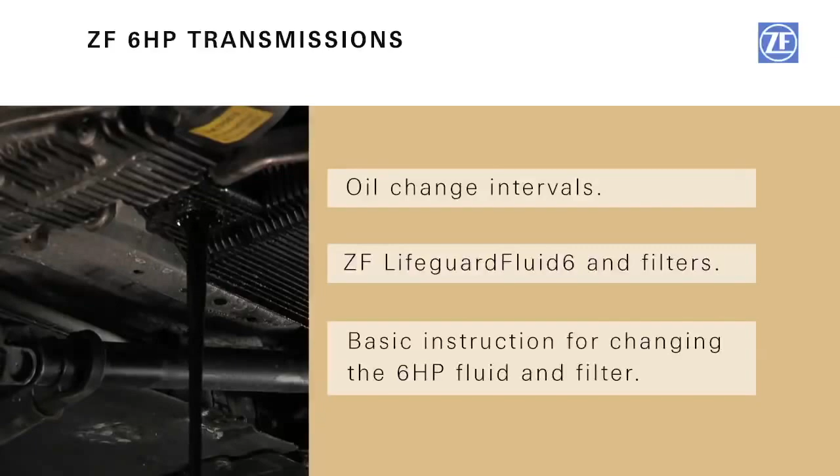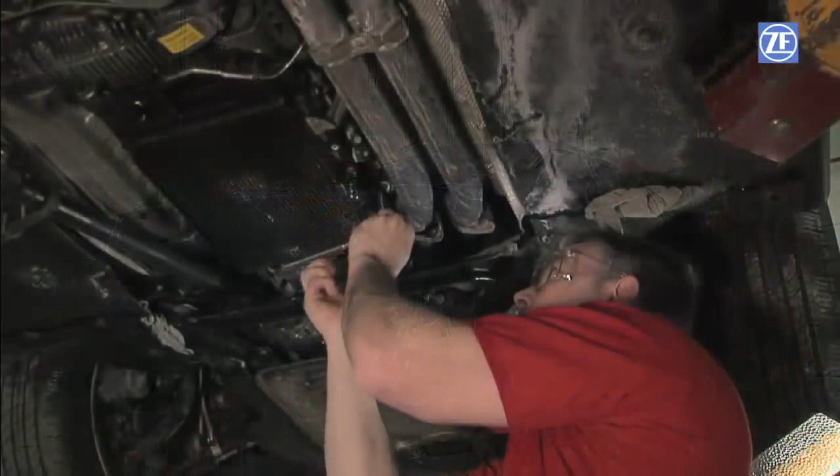A lot of discussion has occurred on the topic of oil change intervals for ZF transmissions. It is important to adhere to your vehicle manufacturer's specified change interval, and it is very important to use authorized fluids. ZF Lifeguard fluids are designed and tested to retain characteristics through normal lifetime operating conditions per the original equipment

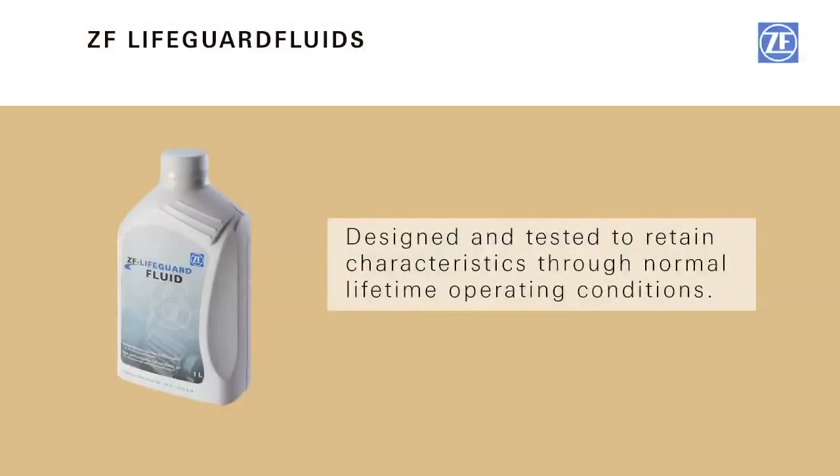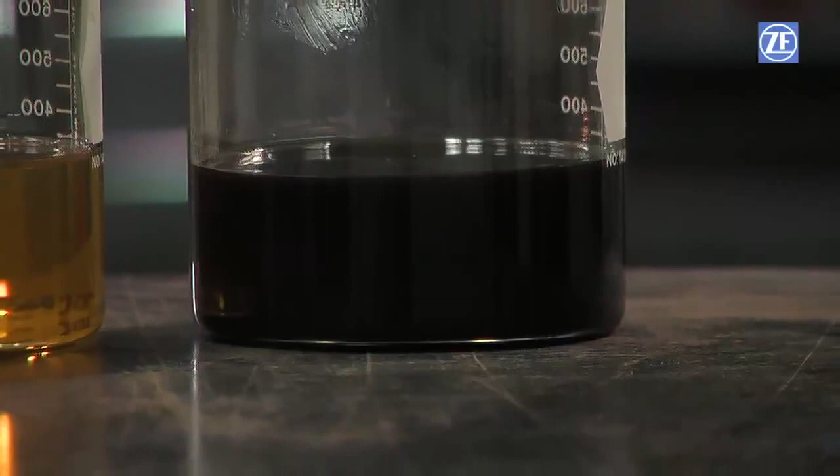vehicle manufacturer's specifications. In instances of extreme driving conditions, special environmental considerations and driving factors which place an increased load on the transmission, it is advisable to perform a drain and fill between 50,000 and 75,000 miles or 8 years.

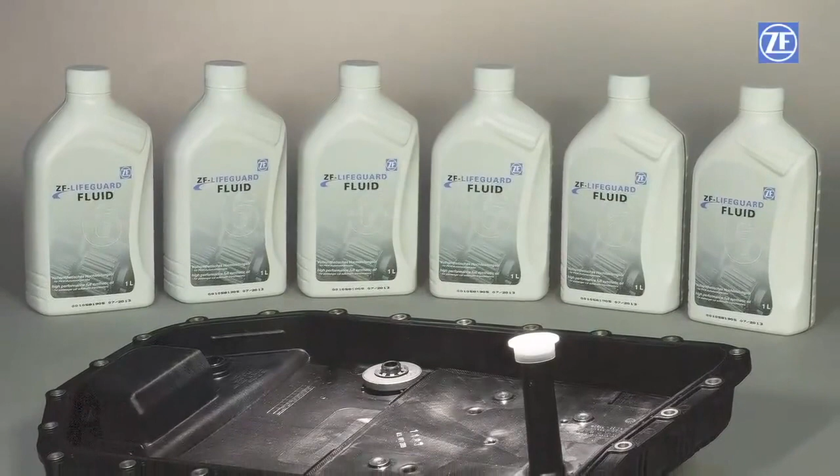ZF recommends that fluid from the dealer or Lifeguard Fluid 6 be used in ZF 6 HP transmissions with a plastic oil pan and filter, including 6 HP 19, 6 HP 21, 6 HP 26, 6 HP 28, and 6 HP 32. Just like any other part in the transmission, Lifeguard Fluid 6 was engineered specifically for the 6 HP

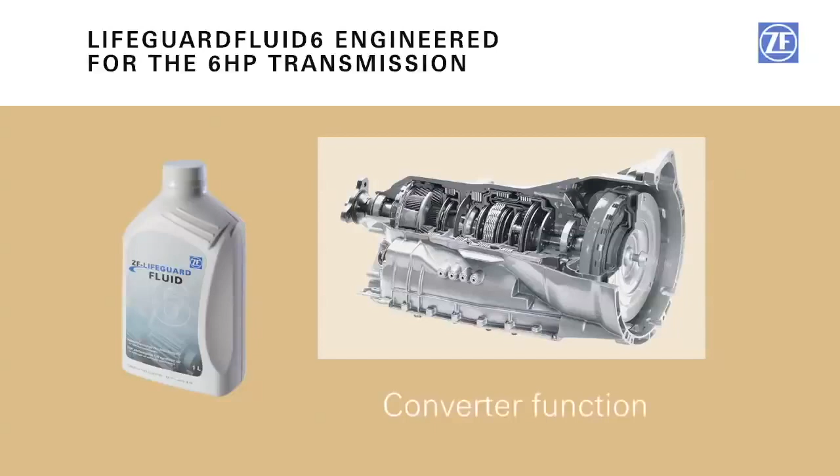transmission. The fluid is the means by which all components in the transmission operate successfully: converter function, mechatronic function, clutch actuation, cooling ability, lubrication, particle suspension and filtration, etc. Using unapproved fluid may void any applicable warranty.

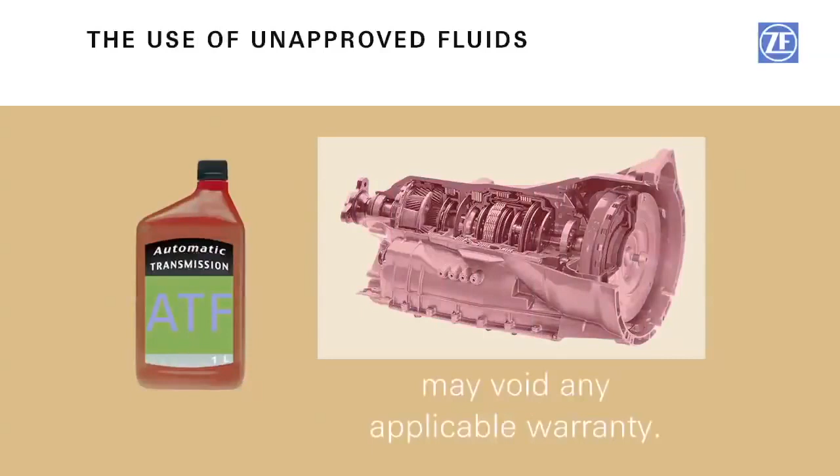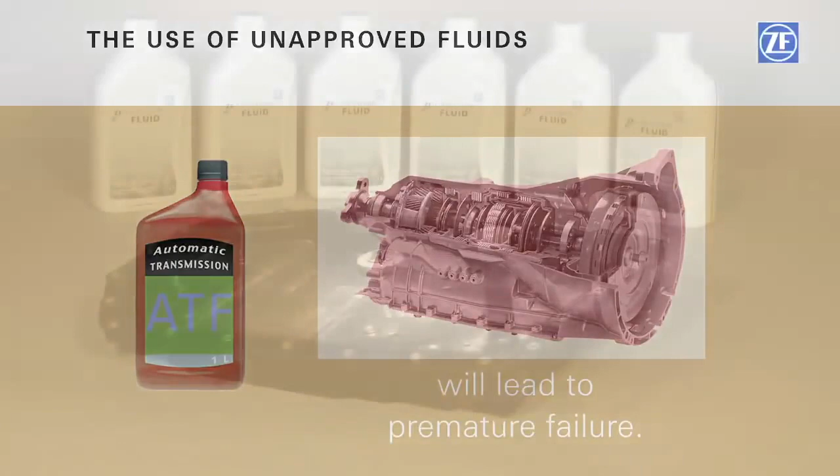It can also lead to poor transmission performance, shift quality, advanced wear of components, and premature failure. Do not second-guess yourself. Use genuine ZF fluid, filters, and parts for assured performance. Now let's look at the procedure to change the fluid and filter on the 6 HP series transmission.

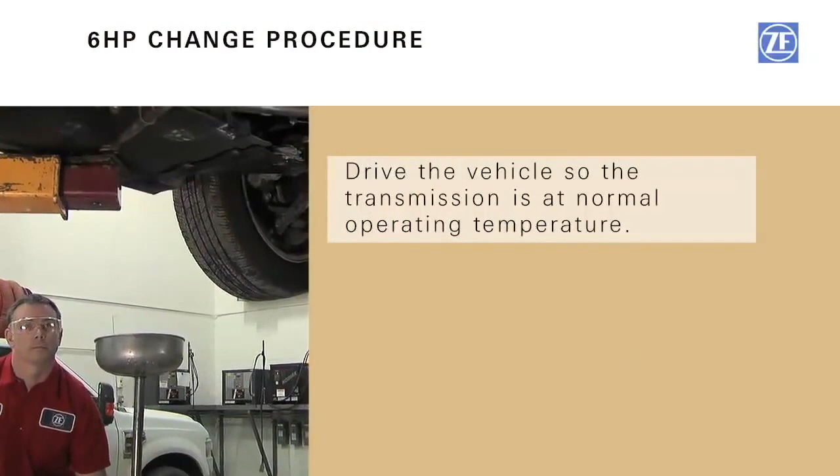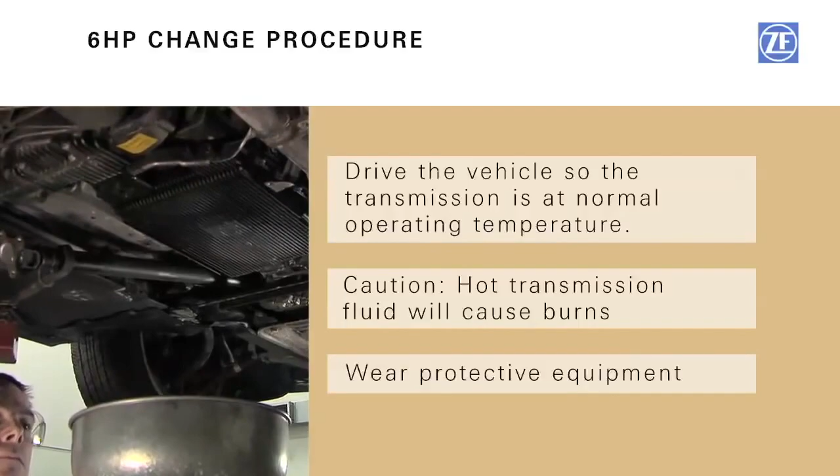You will want to drive the vehicle so the transmission is at normal operating temperature. Caution: hot transmission fluid will cause burns. You must wear protective equipment such as clothing, gloves, and face and eye protection equipment. Now secure the vehicle on a safe and approved automotive lift. It is of the utmost importance that the vehicle is level.

Working under heavy equipment such as a car is inherently dangerous. Please do so at your own risk. Always exercise extreme caution when working under heavy equipment. If you are unsure how to safely secure your vehicle on a lift, do not perform this procedure and take your vehicle to a professional.

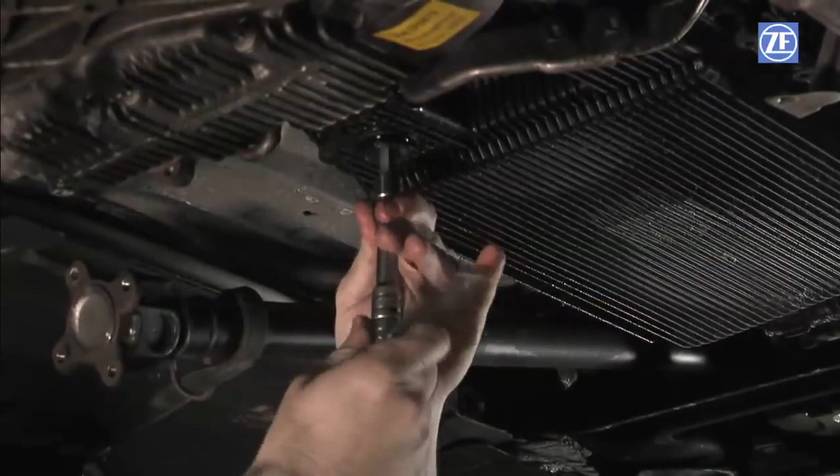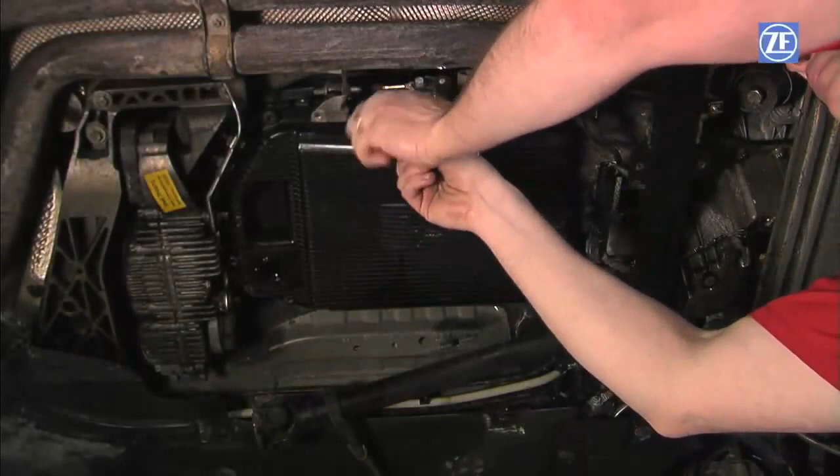Next, drain the fluid by removing the drain plug located on the bottom of the oil pan. After the stream of fluid from the drain plug has stopped, loosen and remove the oil pan screws, leaving only the corner screws in place. To remove the pan, push and hold it against the transmission housing and remove the remaining screws.

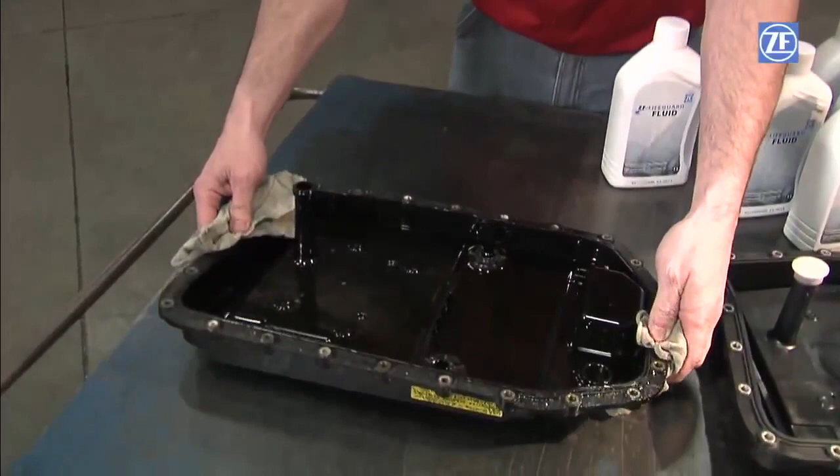Metal shavings in the oil pan indicate transmission damage. An oil change will not fix mechanical issues with the transmission. Clean any oil residue and debris on the sealing surface of the transmission housing. It is important to avoid scratching the sealing surface.

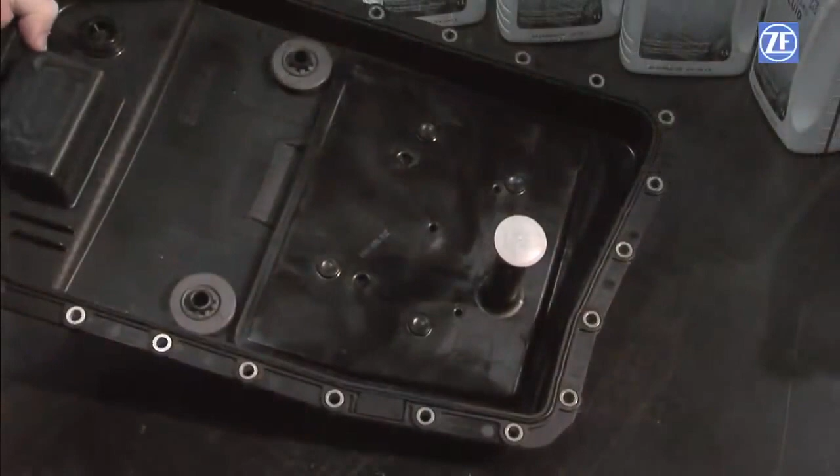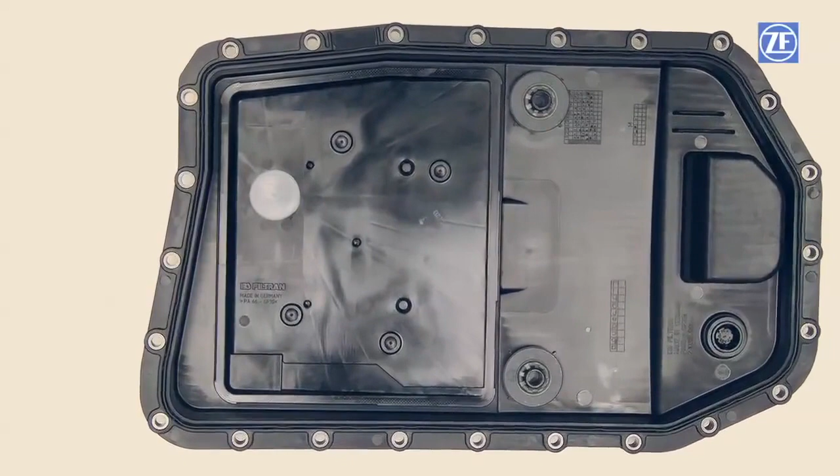ZF 6 HP transmissions with a plastic oil pan incorporate the transmission oil filter. Therefore, the complete oil pan must be replaced with a new one. Genuine ZF filters are engineered with specific filtration media. The use of non-genuine filters may compromise the filtration ability of the unit.

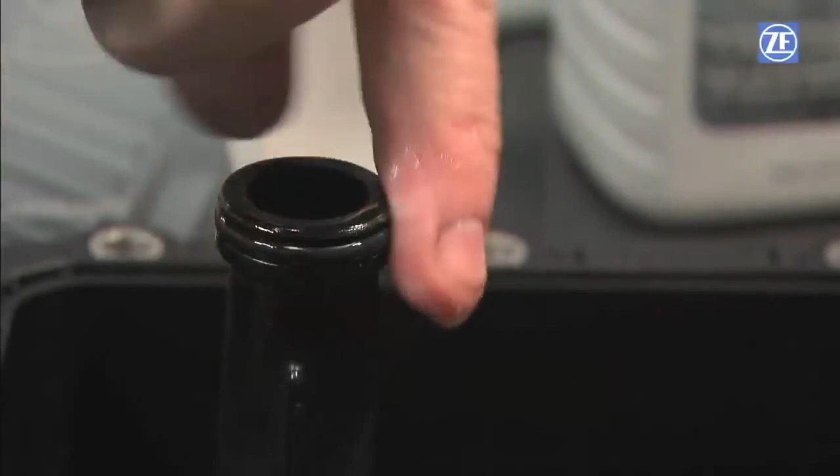Lubricate the O-ring on the filter neck on the oil pan with transmission fluid. Install the oil pan by gently pushing without unseating or damaging the O-ring on the filter neck. Now install all pan screws and torque to 10 Newton meters following a crisscross pattern starting with the middle of the pan.

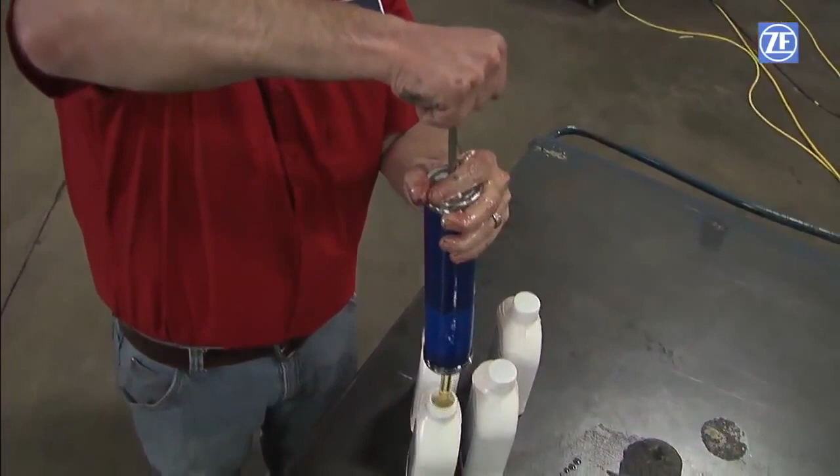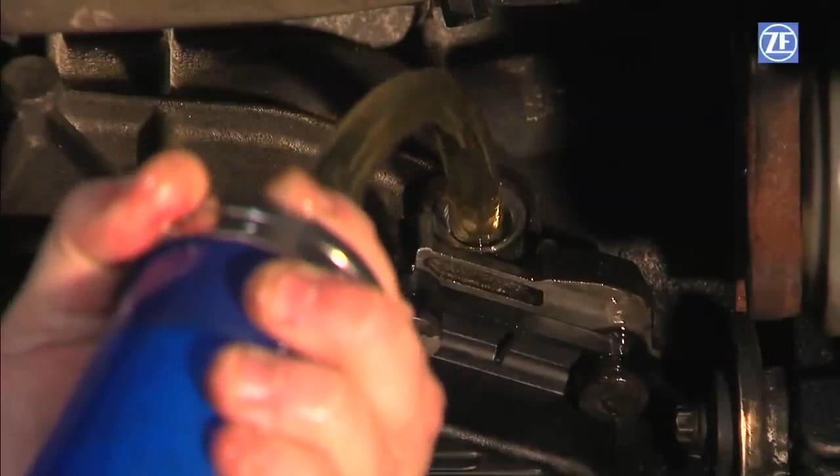To fill the transmission with fluid, a transfer pump must be used since the oil fill plug is on the side of the transmission. Since we are only exchanging the fluid in the transmission and not the torque converter, it may take approximately 4 to 6 liters of oil. Pump new fluid into the transmission until fluid streams out thinly. Next, install the fill plug.

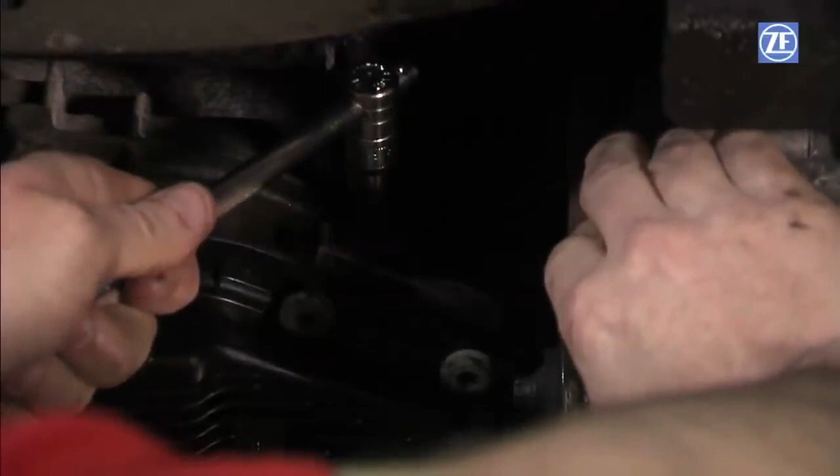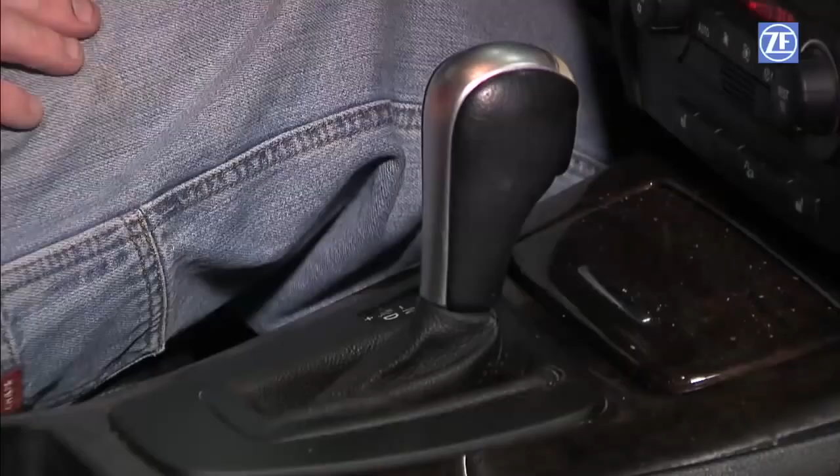With the car safely secured on the lift, start the engine and briefly let the new fluid circulate through the transmission. With your foot firmly on the brake, put the transmission in reverse, followed by placing the vehicle in drive and manual shift up to third gear. Do not allow the drive wheels to spin. Put the transmission in park and apply the parking brake.

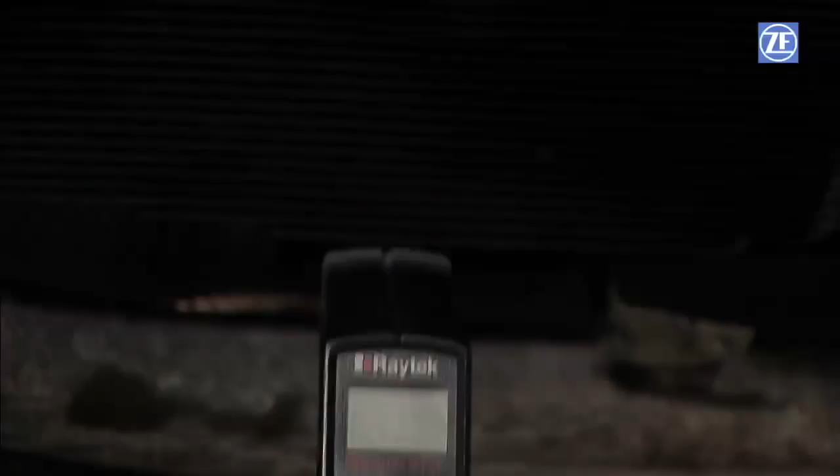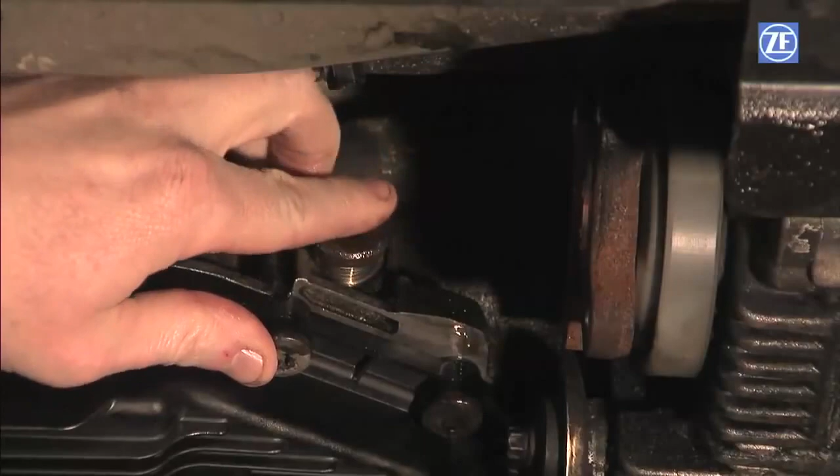Measure the transmission sump temperature. The transmission should be between 30 degrees centigrade and 40 degrees centigrade. With the engine still running at idle speed, loosen and remove the fill plug. If fluid comes out of the fill hole, let it reduce to a thin stream and replace the fill plug.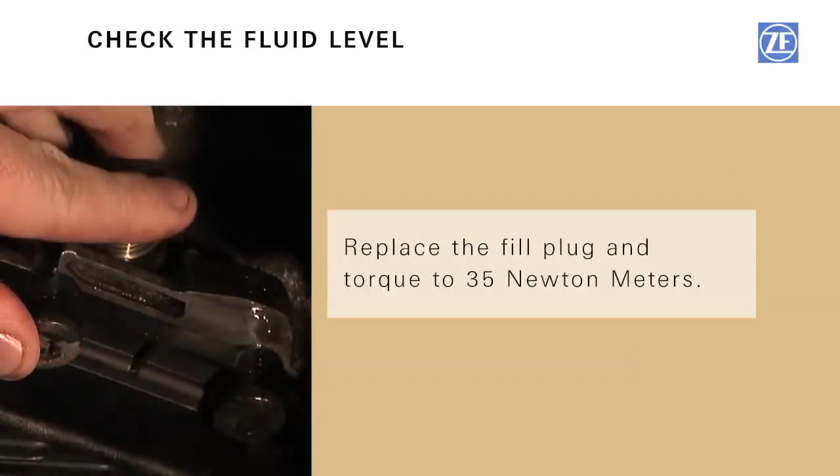If no fluid comes out, pump additional fluid into the fill hole until fluid streams out thinly. Next, replace the fill plug and torque to 35 Newton meters. If the oil level is too low, you may experience shifting problems, which can lead to transmission failure.

If the oil level is too high, you may also experience shifting problems. Transmission oil will overheat quickly, and oil leakage can occur, which can also lead to transmission failure. Congratulations! You have completed a successful fluid change on a ZF 6HP series transmission.